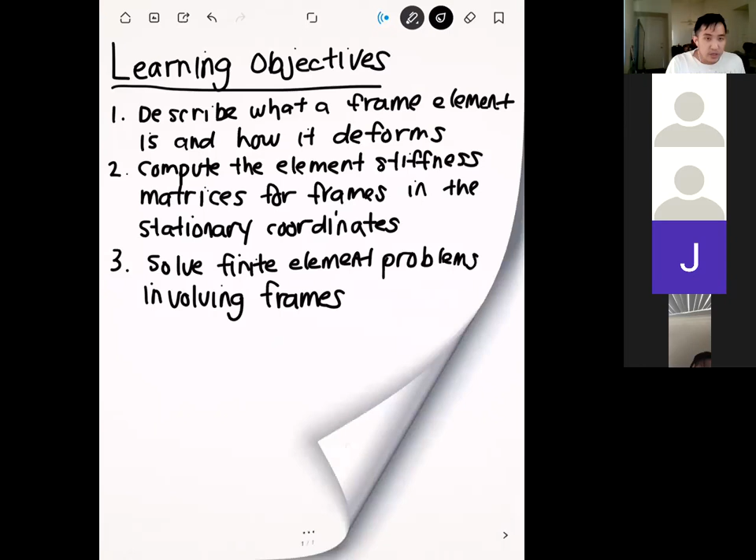Let's go ahead and finish up where we left off last week, last Monday. So where we left off was: how do we take a distributed load and convert that into a nodal load?

Just a reminder, the way we did that was we took the distributed load and used the principle of equivalent work to equate the work done by the distributed load and the work done by the equivalent nodal load. I think where we left off was at the point where we plugged in our assumed displacement function and were solving for the coefficients of each term.

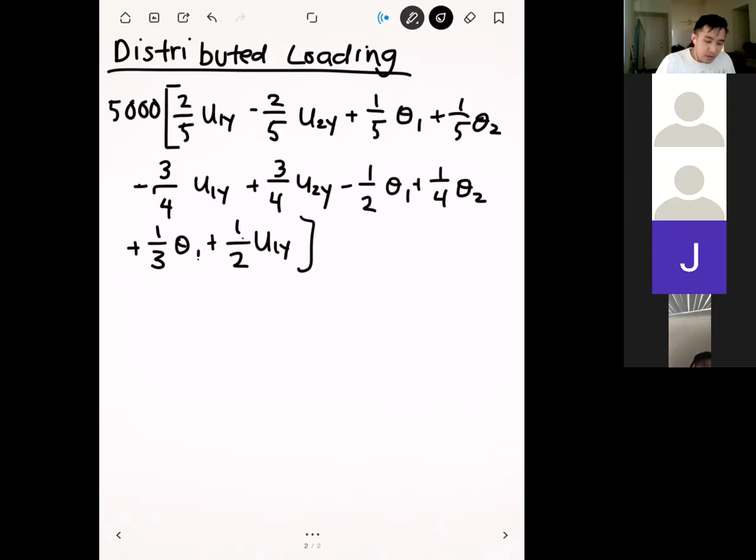Let me write out where we left off. We were at an expression like this: 5,000 (from the loading function w(x)), plus 2/5 u1y minus 2/5 u2y, plus 1/5 theta1 plus 1/5 theta2. These are for beam equations, so these are all the deformations we expect from a beam. Minus 3/4 u1y plus 3/4 u2y, minus 1/2 theta1 plus 1/4 theta2, plus 1/3 theta1, and plus 1/2 u1y. This is the expression we had at the end of lecture last time.

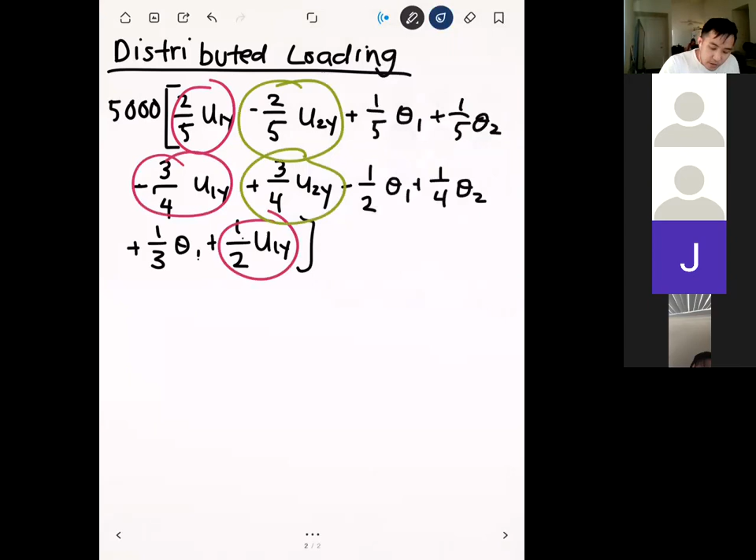What we're going to do now is take all the terms that have the same nodal value—so all the u1y's, then all the u2y's, group those together, then all the theta1's, and all the theta2's. What we want in the end are coefficients for each of these.

Question—minus 1/4, yes, thank you, I think I made that same mistake last time too. Let's go ahead and write that out and group all the terms. So we have 5,000, and then the u1y terms: 2/5, minus 3/4, and then plus 1/2.

Okay, this is all u1y, and so those are basically all the coefficients you see up there. Next, let's do u2y. So we have a minus 2/5, a plus 3/4. Okay, this is u2y.

Next, we have theta 1. So theta 1, we have 1/5, minus 1/2, plus 1/3. Okay, and this is theta 1.

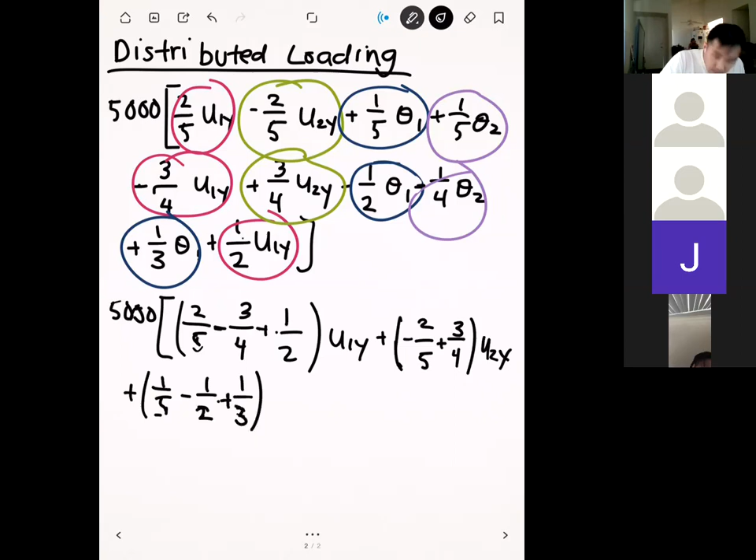And then we have theta 2, which is 1/5 minus 1/4 theta 2. Let me double check. Minus 1/2. Yep. Okay, and so what we do, all we need to do here is just perform this arithmetic, and then we'll get all the coefficients for these guys. All right, any questions on this?

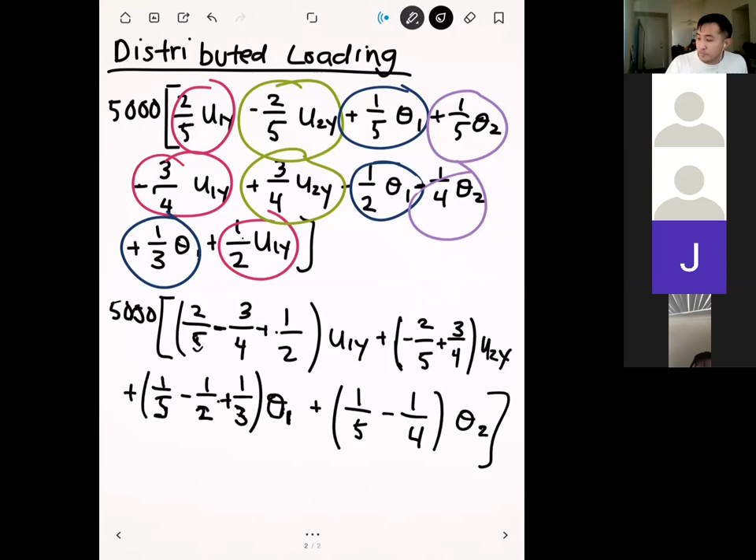Okay, and so let's perform that arithmetic. And so we do that, and then we multiply by 5,000, and we get the following. So we get 750 U1Y plus 1750 U2Y plus our only irrational guy. So we have 500 over 3, theta 1, plus 2,250 theta 2.

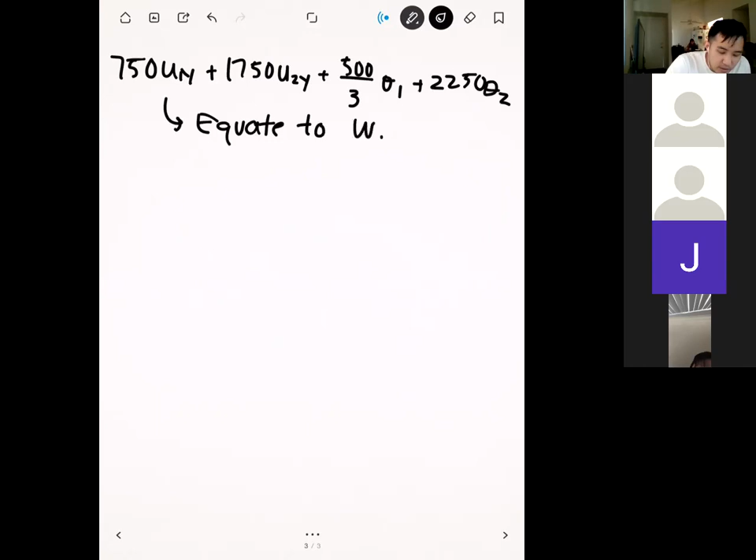Okay, and so now what we're going to do is we're going to equate this to the work done by the nodal forces. So this is work discrete. And so remember, this is equal to F1y U1y plus F2y U2y plus M1 theta 1 plus M2 theta 2. Okay, and so from here, what we can do is we can just equate the coefficients.

So we have 750, that's going to be equal to F1y. Okay, then we have 1750, and that's going to be equal to F2y. We have 500 over 3, that's going to be M1. And then we have 2,250, and that's going to be M2.

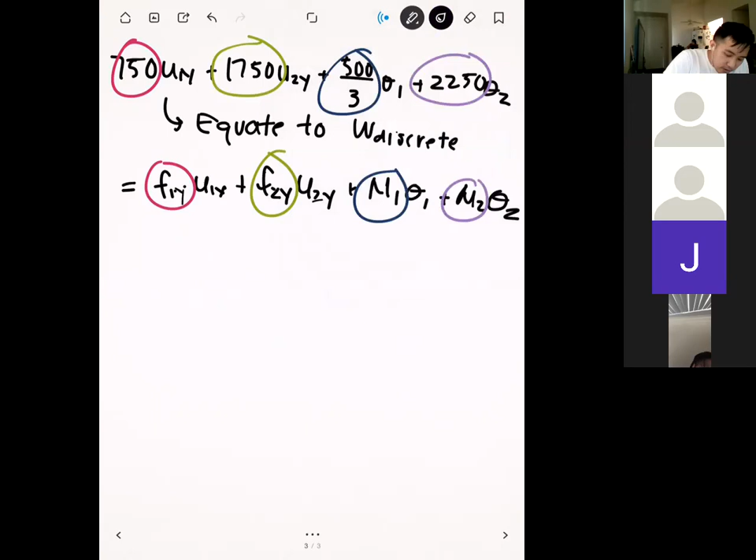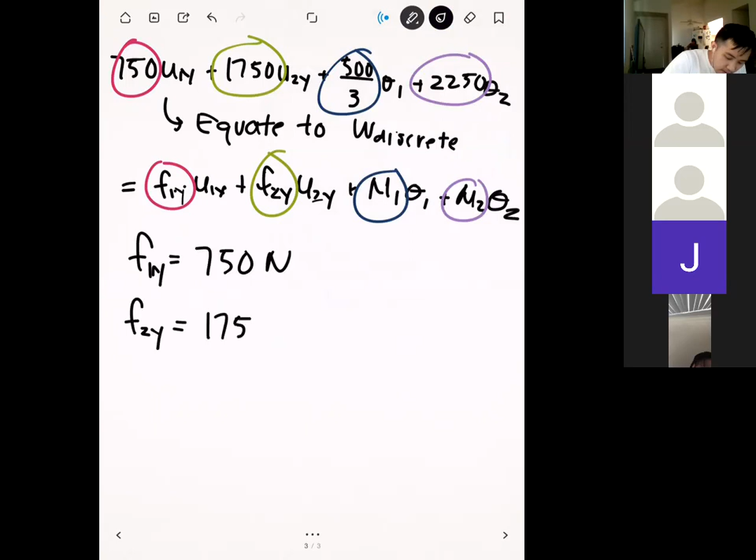Right? And so we can write out our final answer of F1y. This is equal to 750 newtons. F2y is 1750 newtons. Then we have M1, this is 500 over 3 newton meters. And then we have M2 is 2,250 newton meters.

All right, and so that's basically the end of that example of how you transform a distributed loading and then you turn it into nodal loads. Okay, all right, any questions on this example here?

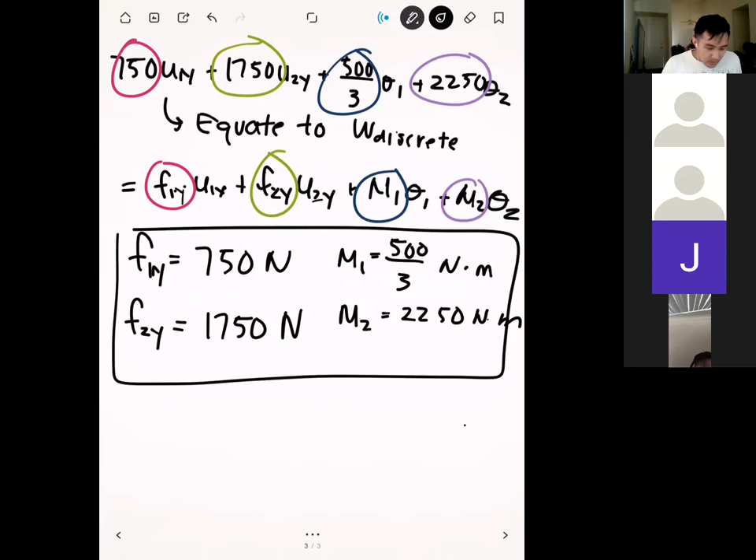Okay, so when you have distributed loading, it's quite a bit of algebra and a lot of work, but hopefully it's not too bad. It's just you have to kind of be careful with your arithmetic and make sure you carry all the signs correct. Okay, and so from there, let's move on to the next topic, which is frame equations.

So frames kind of represent the last element type that we're going to cover here in the direct stiffness method. Okay, and so let's kind of summarize just everything that we've done so far, and we'll categorize that in terms of the types of deformations that they allow.

Okay, so the first one that we did was springs. And because they deform in the same way, we'll categorize them together with trusses. Okay, and these guys were similar in that the way that they deformed was purely axially, so only you can only compress them and you can only expand them.

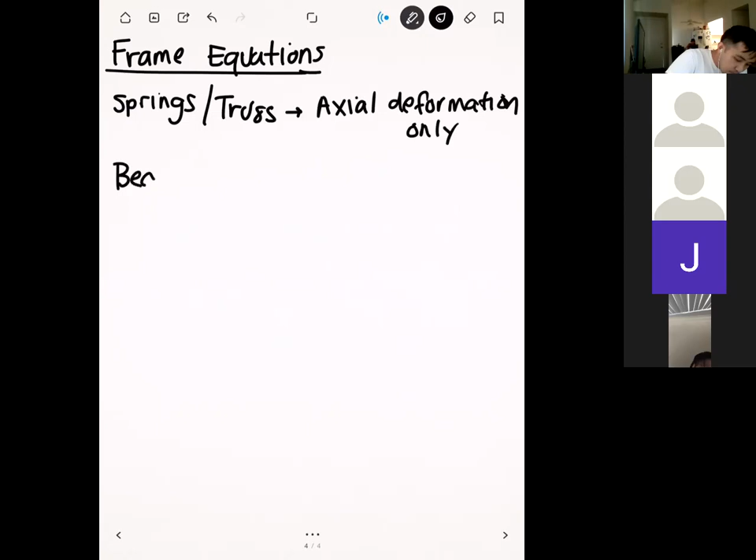And so the unit that we just finished is on beams. And so beams are unique because they can do both transverse deformation and rotation.

Okay, and so what this means is that if you want to use this direct stiffness method to analyze some kind of structure, you have to kind of make a prediction beforehand about how you think those structural elements are going to deform. And so if it's going to be a system where you only expect the elements to compress and elongate, you can model it as a truss.

But if you see that the beams or the structural elements are going to be loaded transversely and there's going to be a lot of bending, then you might select a beam for that. Okay, but as you know, in reality, a lot of times it's not that simple.

So a lot of times you'll have a structural element where you expect all kinds of deformation: axial deformation, transverse deformation, and rotation. And so in those cases, it's going to be hard to choose whether you want to do a spring, a truss, or if you want to do a beam.

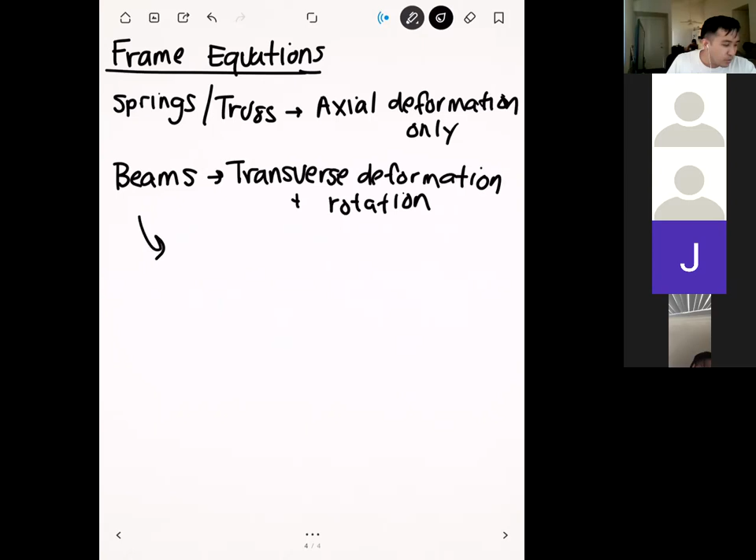But in these cases, which are complex and you can't choose, you can ask that one cute little girl from that mobile commercial a long time ago: so why not both?

Because real structural elements can deform in all these different ways, why don't we just design an element that can do all these kinds of deformations? That's exactly what a frame is. Frames can exhibit all these different types of deformation.

The way that we're going to progress through this unit is exactly the same as what we did for the previous ones: first we're going to develop the element stiffness matrix, and then once we have it, we can start to use it in problems. The only thing that's really different between all the different types of elements we've covered so far is just the element stiffness matrix. But once you have it, the way you go about assembling, assigning boundary conditions, and solving is always the same.

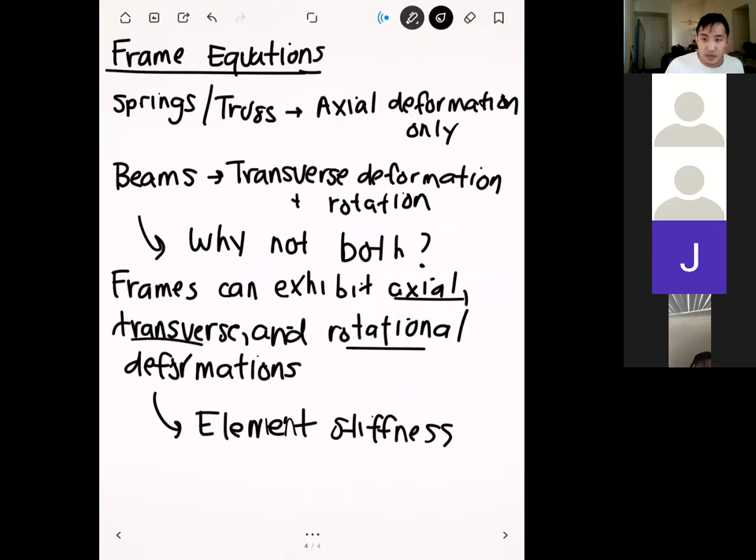Okay, so first let's do that. Let's find the beam element stiffness matrix in the stationary coordinates.

If you recall from the week that we did truss elements, the way that we transformed from the local coordinates to the stationary ones was we had to apply our transformation matrix. So our relationship looks something like this: on the left here, we have the deformations in the local coordinates.

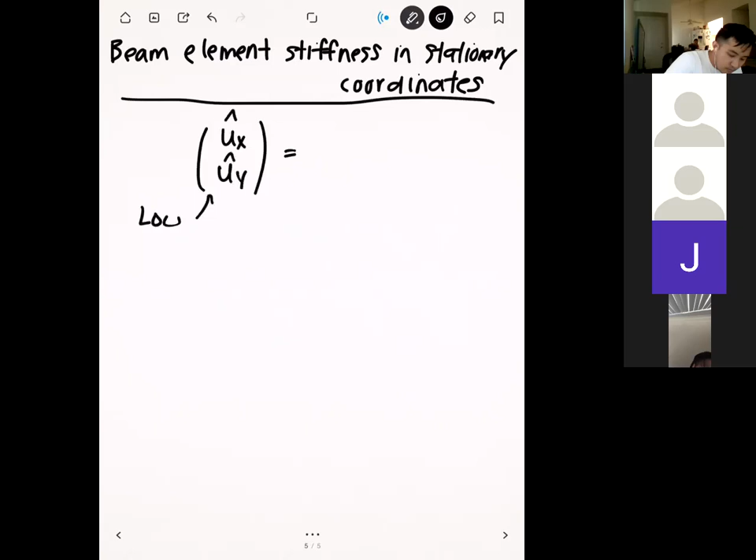Here we're just considering x and y, so there's no rotations. And then the way that we related this to the stationary deformations was that we multiplied by a matrix here. Our transformation matrix was cosine, sine, minus sine, cosine.

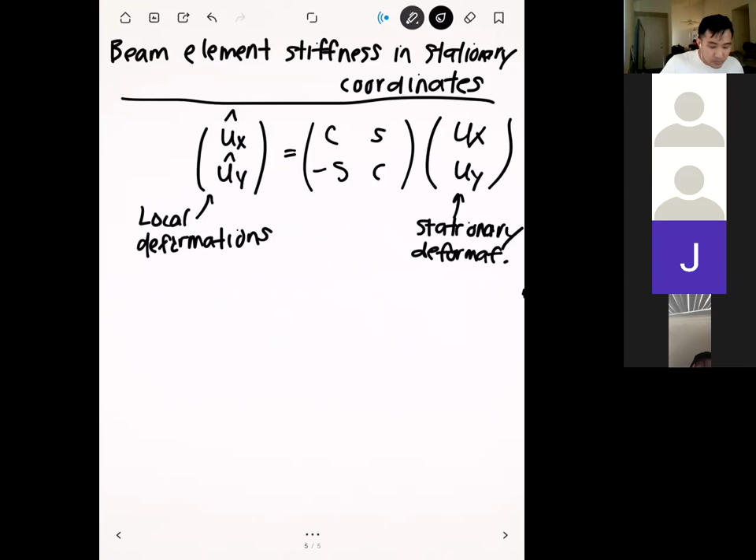So all we have to do in order to get the beam elements is to first expand this transformation matrix in order to account for the fact that our beam has two nodes and it has rotations. Let me just label this first, and for beams it would look something like this.

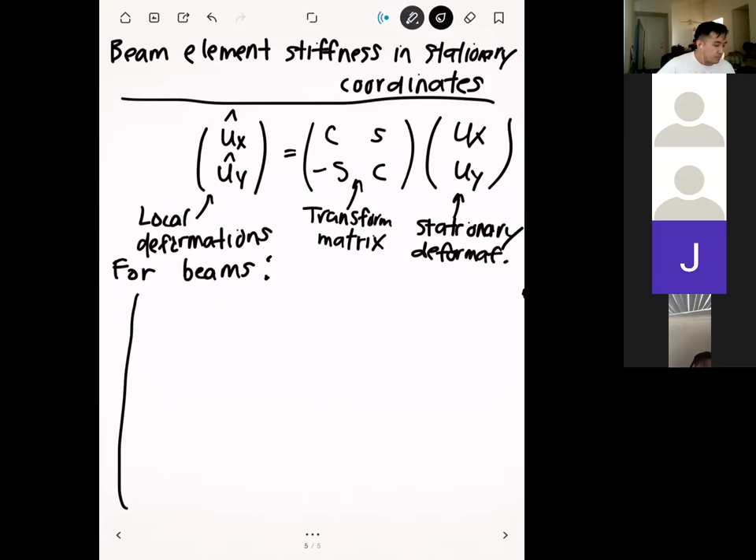First of all, even though our beams only have a transverse displacement and rotation, we're going to expand this to include everything. So we're going to have u1x hat, u1y hat, and we're also going to include the rotations, so we have theta 1. And then the same things for node 2: we have u2x hat, u2y hat, and theta 2 hat.

And so if we expand this transformation matrix, we can get the transformation. This is going to be cosine, sine, minus sine, cosine. That's our transformation matrix, and that's how we're going to transform the ux and uy.

So the question now is, how do we actually transform the rotations? Because the rotations here don't show up in our transformation matrix. We're actually in luck: since rotations don't have any units, we don't need to transform them at all. We can just put the same values over like that. Since rotations are given in terms of radians, which isn't technically a real unit, we don't have to multiply by sine or cosine, so we can just have a 1 right here.

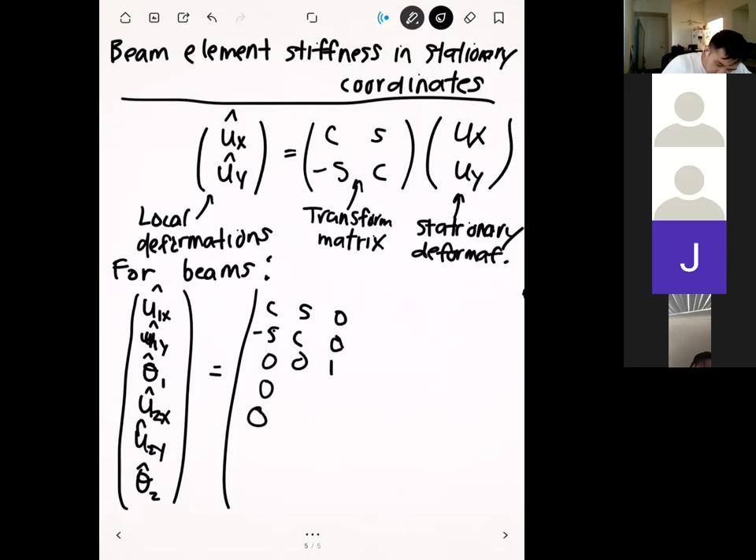Okay, so that's the transformation quadrant for node 1. And then we input the same thing for node 2. So we have cosine sine 0, minus sine cosine 0, and then 0, 0, 1. So here's the transformation quadrant for node number 2.

And this is going to be equal to the analogous things in the stationary coordinates. So we can use this transformation matrix along with the local deformations in order to get the deformations in the stationary coordinates. Any questions on this?

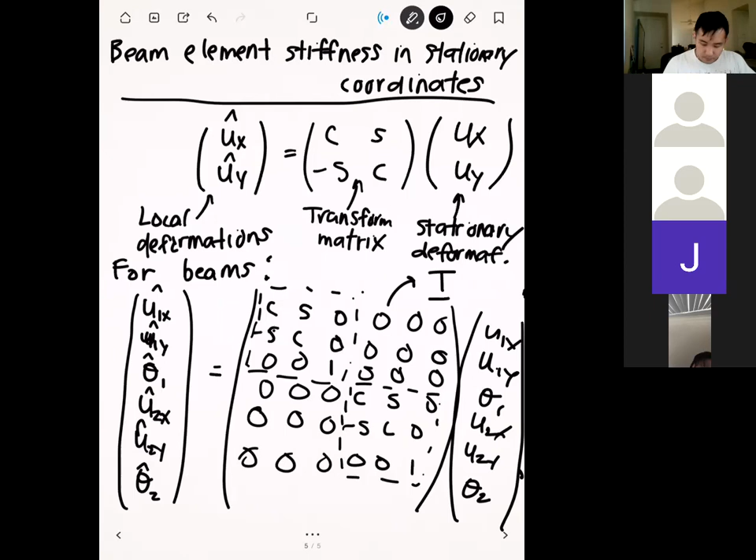Now that we have our transformation matrix that accounts for the rotations, all we have to do is multiply this both before and after our element stiffness. So in order to get the element stiffness in the stationary coordinates, we take K, where K hat here is the element stiffness matrix for a beam, which we covered last week. We pre-multiply by our transformation matrix transposed, and then we also post-multiply by that as well. So same process that we did for trusses, except now our K is different. If we evaluate this, we get the following.

So we still have an EI over L cubed out in front.

Then we're going to have 12 sine squared, minus 12 sine cosine, minus 6L sine, minus 12 sine squared. Actually, let me rewrite this so I have more room. So it'd be 12 sine squared, minus 12 sine cosine, minus 6L times sine, minus 12 sine squared, 12 sine cosine, and then minus 6LS. So that's the first row.

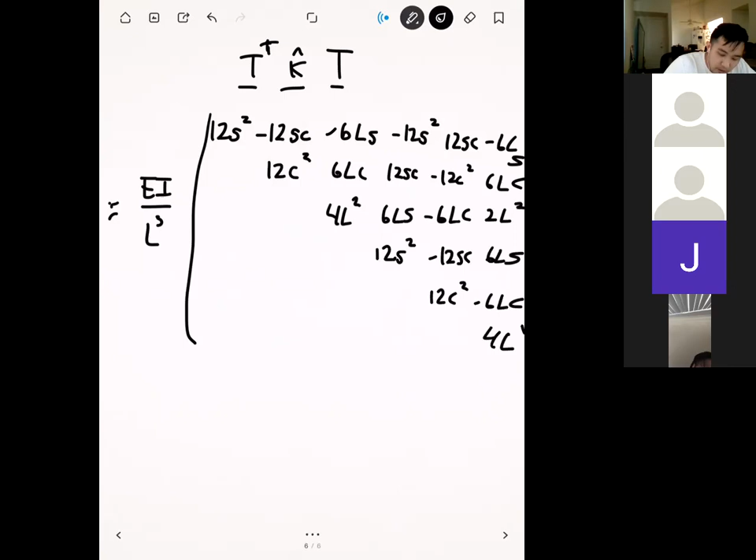We have 12 sine squared, minus 12 sine cosine, 6L sine. Then 12 cosine squared, minus 6L cosine, and then 4L squared. And of course, this is symmetric.

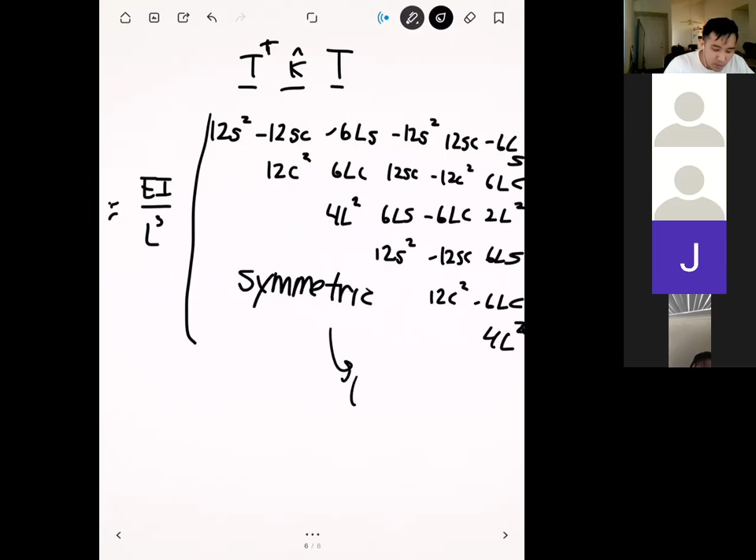A much neater version is in the notes, so I would look at that one more than this. But you can see that this is starting to get pretty big. So now we have an element stiffness matrix that's 6 by 6, which I think is bigger than anything we've had before. The addition of the rotations that the beam introduces really complicates things quite a bit, and it makes our element stiffness really huge.

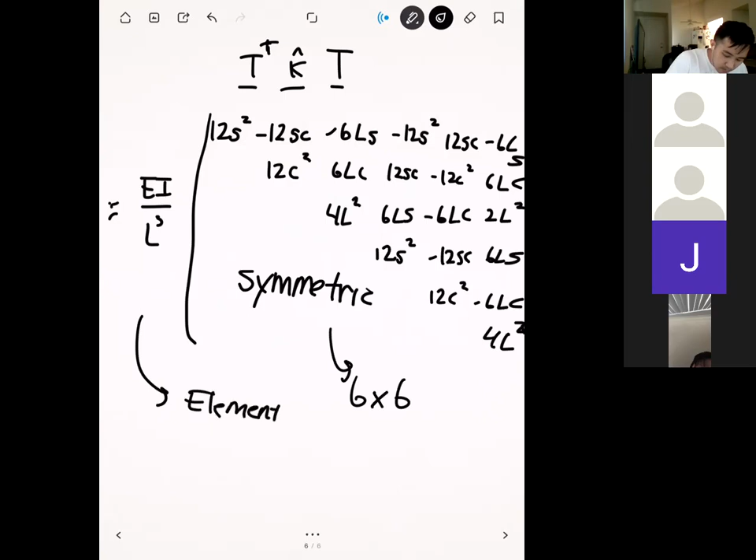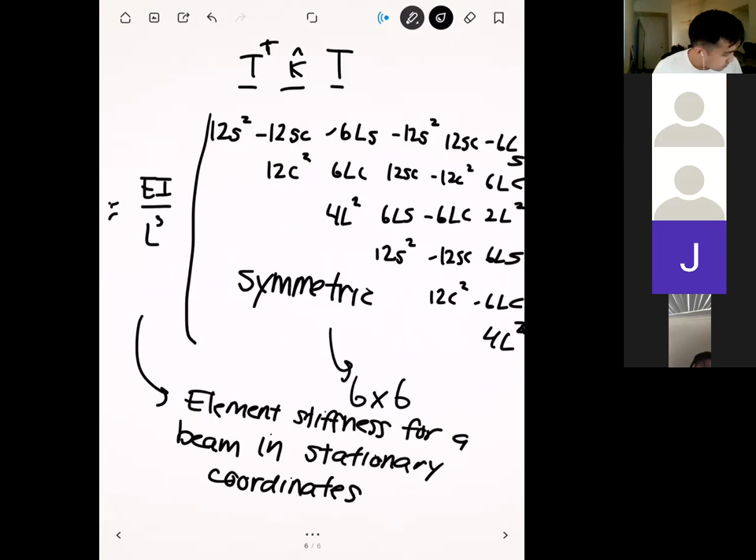And so this is our element stiffness matrix for a beam in the stationary coordinates. Any questions on this?

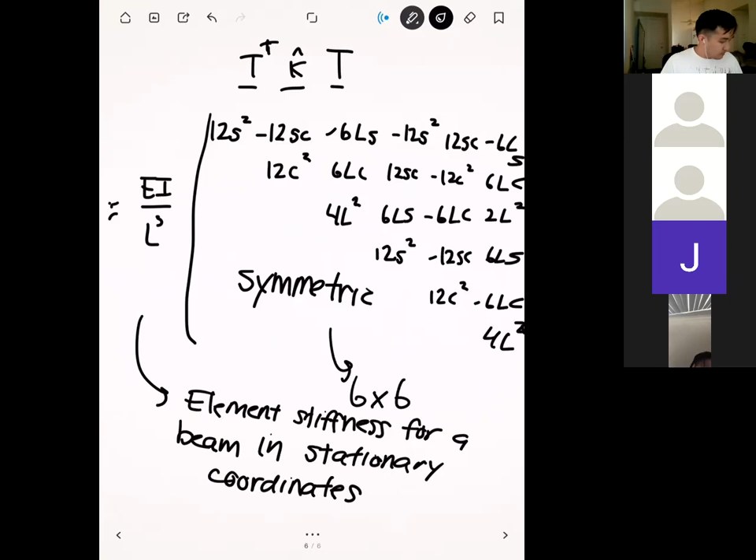So that's the stationary coordinates for the beam, but we're not really interested in beams anymore. We want to move on to frames. Remember, frames combine both the axial deformation of a truss together with the transverse and the rotation of a beam.

That kind of begs the question of how are we going to form this element stiffness matrix? Well, we actually don't have to do that much, because we already have an element stiffness matrix for a truss, and we already have one for the beam. Why don't we just combine the two into one?

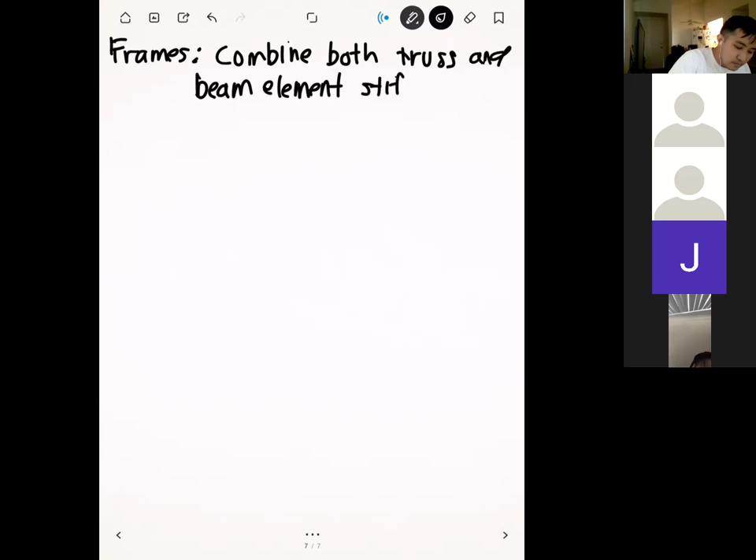So let's do this first in the local coordinates. Let's define two variables just to make things easier, hopefully help me fit it all in one line. Let's define C1 to be, if you remember, kind of like our spring constant for a truss. So it's the cross-sectional area of the element times the Young's modulus divided by the length.

Question: for multi-axial deformation, do we have to have rotation not be dependent? Yeah, that's true. If you have a three-dimensional problem where the rotation can go both in and out of the plane, then there's going to be some dependencies there. But we're just considering 2D problems, so the rotation is assumed to be independent. We also assume relatively small rotations, so we can relate it to the transverse deformation by the derivative, which helps keep it independent from each other.

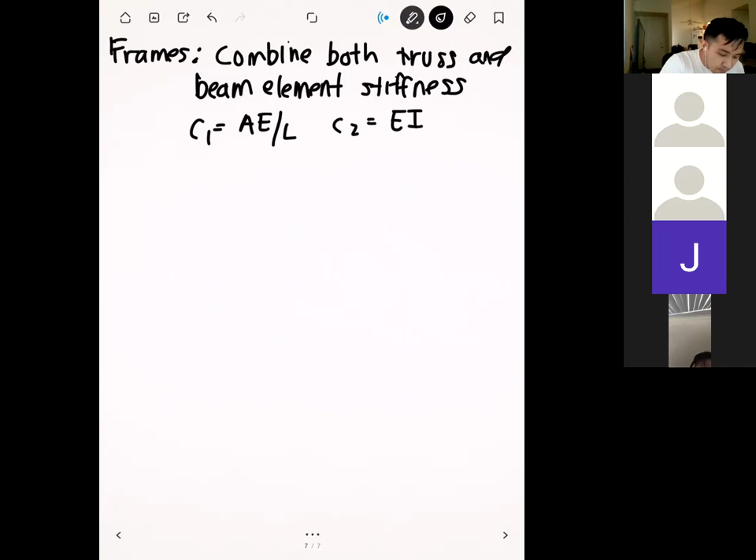Okay, and so we can define another constant C2, and this will be EI all over L cubed. And if we just straight up combine these guys together, then we get the following matrix.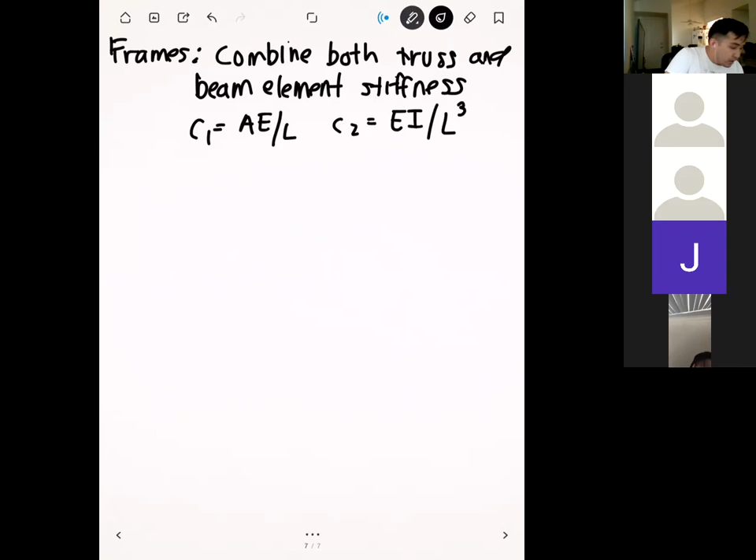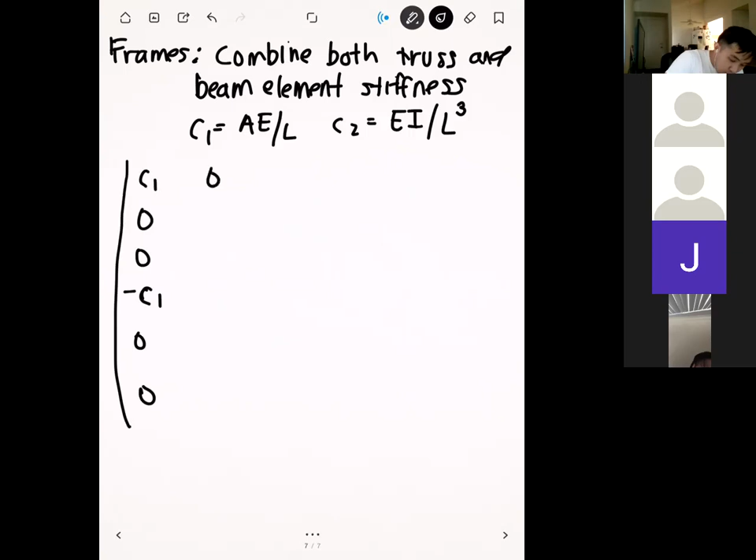Okay, so we have C1, let me go down the column first. So C1, 0, 0, minus C1, 0, 0. Okay, then we have 0, 12, C2, 6, C2L, 0, minus 12, minus 12, C2, and then 6, C2L.

Okay, and so if you notice from the C1, C2, the C1 comes from the truss and the C2 comes from the beam. Then we have 0, 6, C2L, 4, C2L, 0, minus 6, C2L, and then 2, C2L.

We have minus C1, let's bring that closer here. Minus C1, 0, 0, C1, 0, 0.

And then we have 0, minus 12, C2, minus 6, C2L, 0, 12, C2, minus 6, C2L. Right, and then our last column: 0, 6C2L, 2C2L, 0, minus 6C2L, 4C2L squared. Okay, and so this guy right here, this is the element stiffness matrix for a frame in the local coordinates.

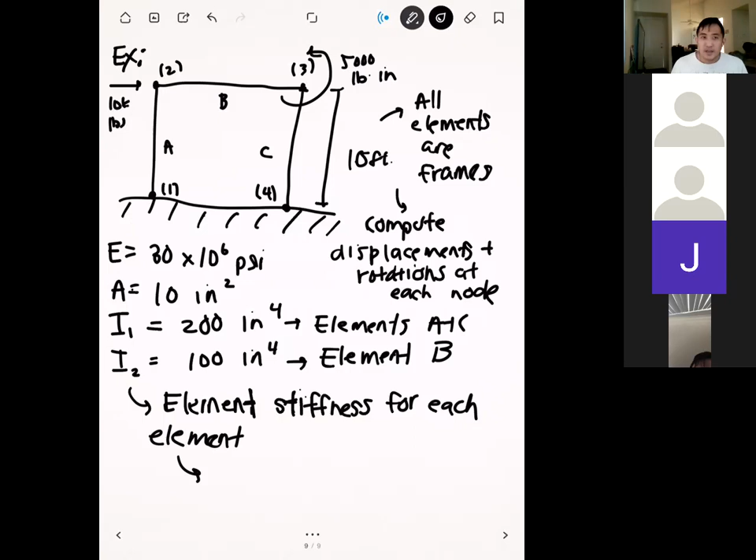And so the biggest challenge with these frame problems is that your global system, and actually all your matrices, are going to be enormous. It takes a lot of space to write these guys, but the process is still the same, so we're going to go through that right here. Before we jump into that, are there any questions on the problem setup?

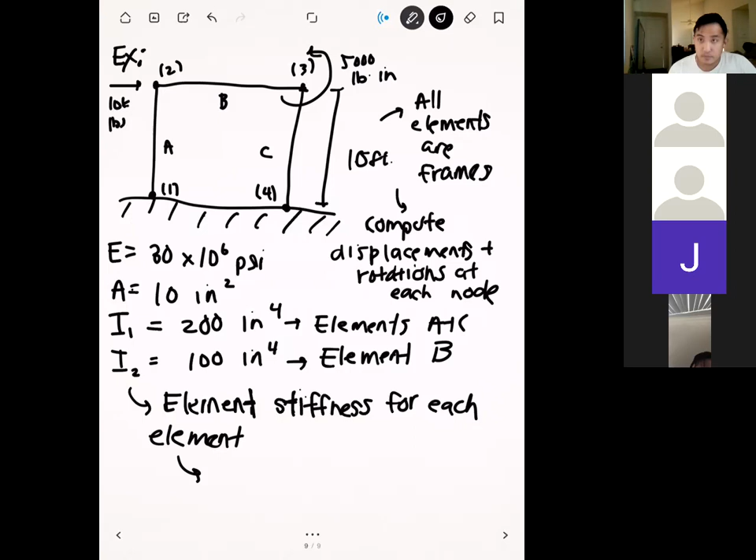Okay, so let's run through this. Let's start with element A.

So for element A, our angle here is 90 degrees. Cosine of 90 is equal to 0, and sine of 90 is equal to 1. I chose this as our first example problem on purpose, because having a 90-degree angle means a ton of terms are going to cancel out.

I'm going to give you the Matlab script, but if you did want to compute this by hand, usually it's helpful to compute some of these constants ahead of time.

So let's say you want to compute 12I over L squared. This is going to be 0.167 inches squared.

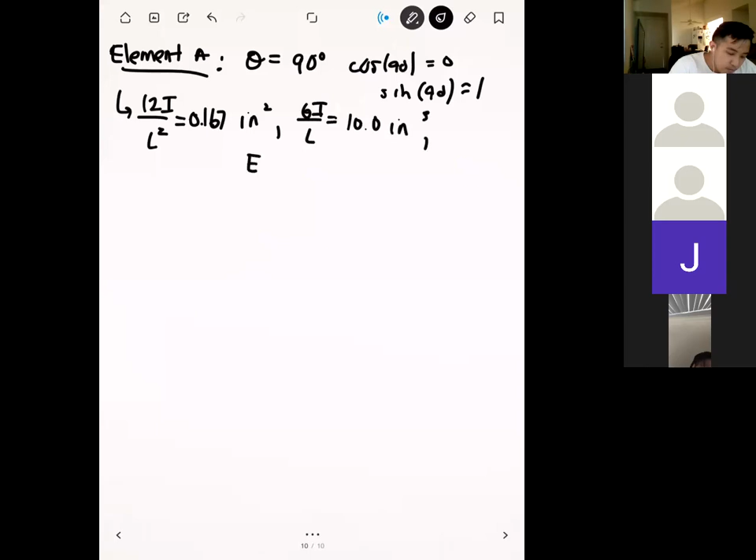Next, we can compute 6I over L, and this would be 10 inches cubed. Then finally we can compute E over L, the term out in front, and it's going to be 250,000 pounds per inches cubed.

So we plug all these numbers in. For now we can just assume Matlab did it, and then we get the following matrix. First we have our E over L factor out in front, and then we have our 6 by 6 matrix here, which is going to be.

0.167, 0, minus 10, negative 0.167, 0, minus 10. Then we have 0, 10, 0, 0, minus 10, 0. Then we have minus 10, 0, 800, 10, 0, 400. Then we have minus 0.167, 0, 10, 0.167, 0, 10. We have 0, minus 10, 0, 0, 10, 0. Then we have minus 10, 0, 400, 10, 0, 800.

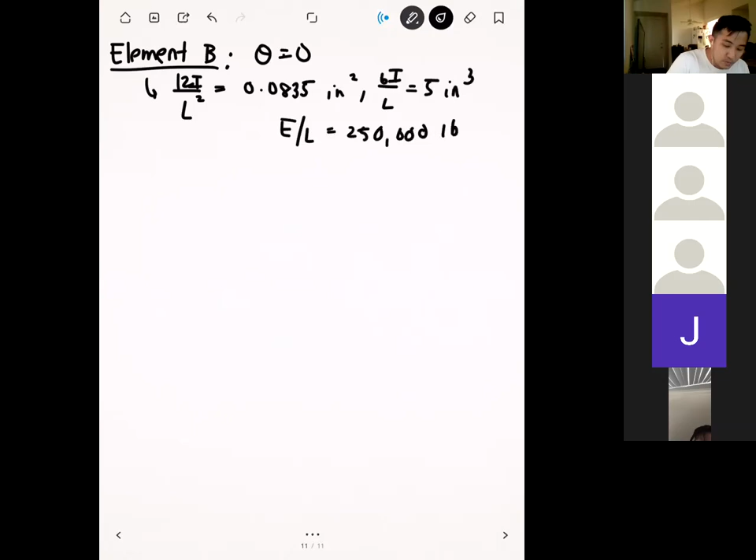So we can plug this in and get a similar kind of matrix, KB. I'll just write the first 3 rows and you can pick it up from there. This is going to be 250,000, times: 10, 0, 0, minus 10, 0, 0. Then we have 0, 0.0835, 5, 0, minus 0.0835, 5. You guys hear my cat in the background? Then 0, 5, 400, 0, minus 5, 200.

There's 3 more rows here, but you get the idea—this is just plug and chug at this point. And then we can do the same for element C.

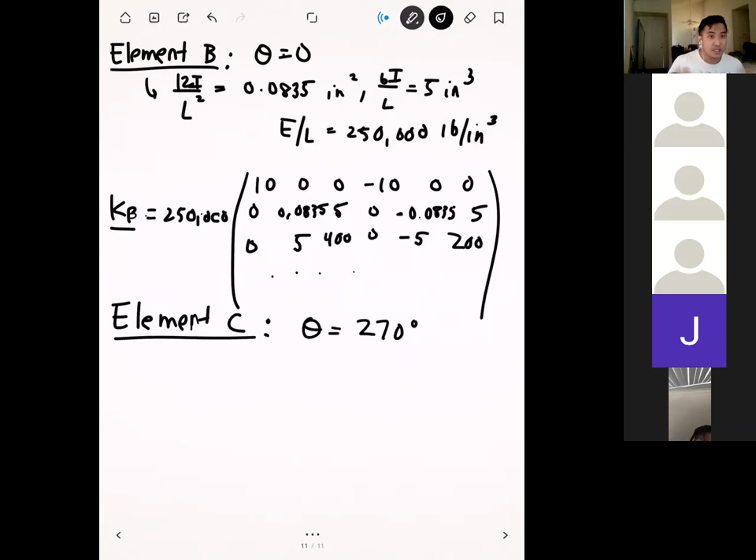Okay, so element C, the lower number node is on top, and so in order to rotate all around, our theta has to be 270 degrees. And these actually have the same parameters as element A, so just some of the signs would be reversed, and KC will also equal 250K.

And then we'll have our 6x6 matrix right here. I have all these written out in the notes. It's just in the lecture, because my iPad's really small and we only have a limited amount of time, I'll leave that to you guys. But it's basically just the same process we did before, just the matrix is a lot bigger.

Okay, so now that we have the element stiffness matrices, you have them in the notes. What we're going to do now is assemble our global system.

And since we have 4 different nodes here, and each of the nodes has 3 different degrees of freedom, that means our global system is going to be 12 by 12. The global system I'm also not going to write because I'm definitely not going to be able to fit it, but I'll at least show you where each of the stuff fits into the matrix. Any questions on this?

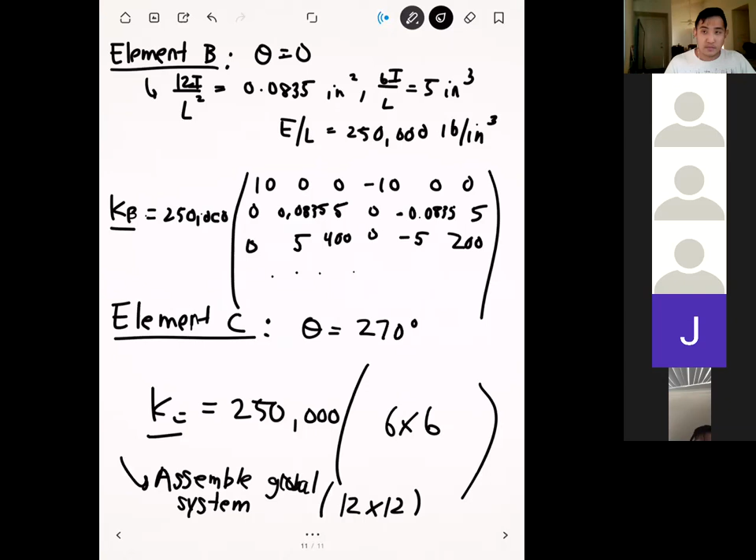Okay, so let's write out our global system. I'll give you the bones of it. You can imagine this is a 12 by 12 matrix, which is way too big to fit here. But what we can do at least is tell you where each of the different element stiffness matrices fit in.

So first we have element A, and this is our 6 by 6 matrix from element A. Next we have the 6 by 6 matrix from element B. And then finally we have the 6 by 6 matrix from element C. These are all the same methods that we used before, it's just now we've upped the scale quite a bit because we've added rotations and transverse displacements.

And I made a note of this in the homework too. The homework's not posted yet, but it will be posted soon. To construct this global system, I don't want you guys to have to write down such a long big matrix, because some of the homework problems actually are going to get even bigger than this. So if you want to use a spreadsheet program like Microsoft Excel or Google Sheets to present the global stiffness in a neat way, I would go ahead and use that, because that's a lot more practical.

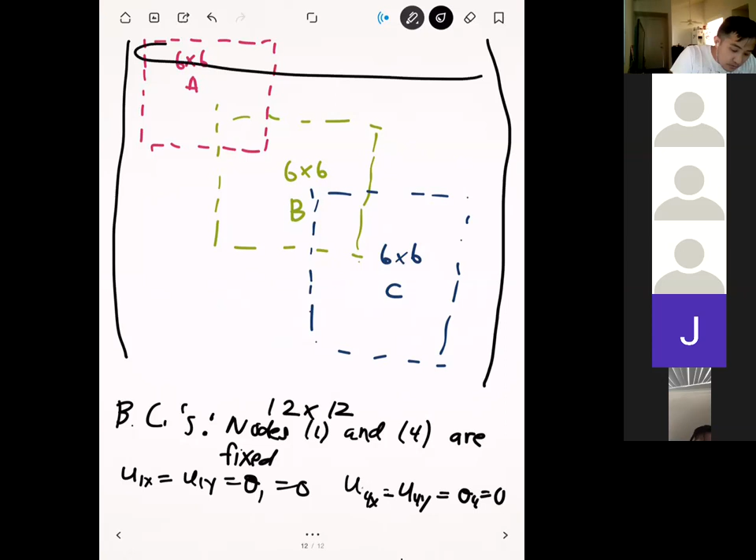So that means the first 3 rows of this matrix, and then also the last 3 rows, those are going to be replaced with our Dirichlet boundary condition. So we're going to put 1 on the diagonal and zeros everywhere else, and then zeros on the right-hand side. And then also we have to put our loads on the right-hand side too.

So remember, we had 2 loads in this case. We had a load of 10,000 on U2x, and we also have a moment of 5,000 on theta 3. I know I'm skipping all the numbers here, but all the numbers are given in the lecture notes. But are there any questions on this?

Okay, so once you plug that in, you can solve for the solution, and you'll get all the deformations, all the displacements, all the rotations at every node that can do it in this mesh. So in this case, it's only been nodes 2 and 3, so you're going to have 6 non-zero values.

Before we move on to the next example, I just want to make a couple quick notes. So first of all, just like we did in the beam equation, what you can do here is compute the reaction forces on each of the elements, or each of the nodes.

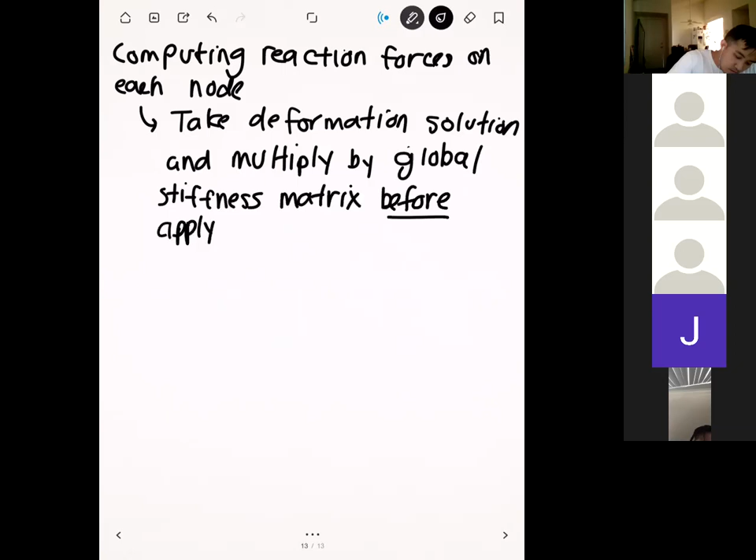Okay, so that'll give you all of the reaction forces and reaction moments in the stationary coordinates. And one thing we haven't done yet is take these reaction forces and transform them back into the local system.

So why would you want to do this? Oftentimes it's useful to compute the forces down the length of the element and transverse the element, because from those you can compute things like stresses or bending stresses. When the forces and moments are in the stationary system, you can't do this. So to get the stresses, it's usually a good idea to transform this back into the local system, using the same transformation matrix we've seen before.

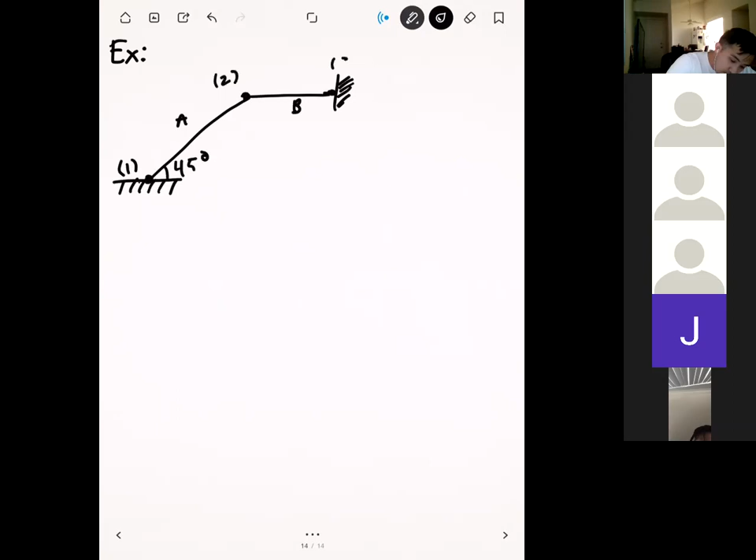So for this problem, we have a frame element that looks like this. Thankfully, we only have two elements in this case. We'll call this element A, and this element B. This angle right here is 45 degrees. And we'll label the nodes just like that.

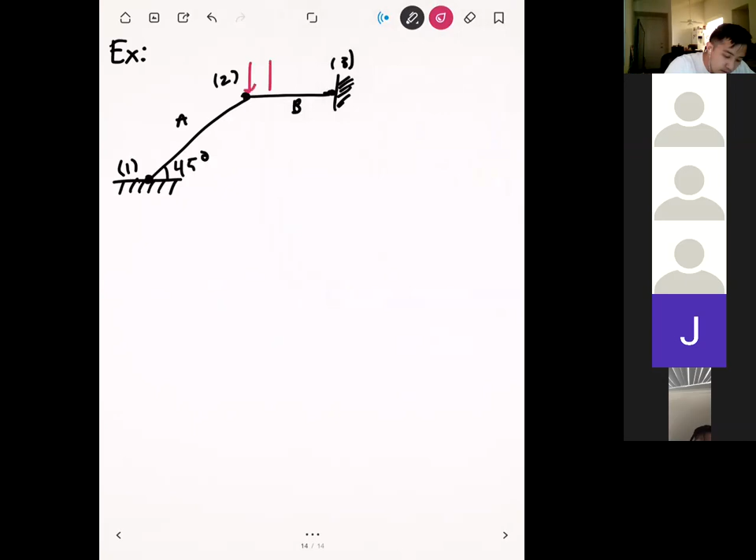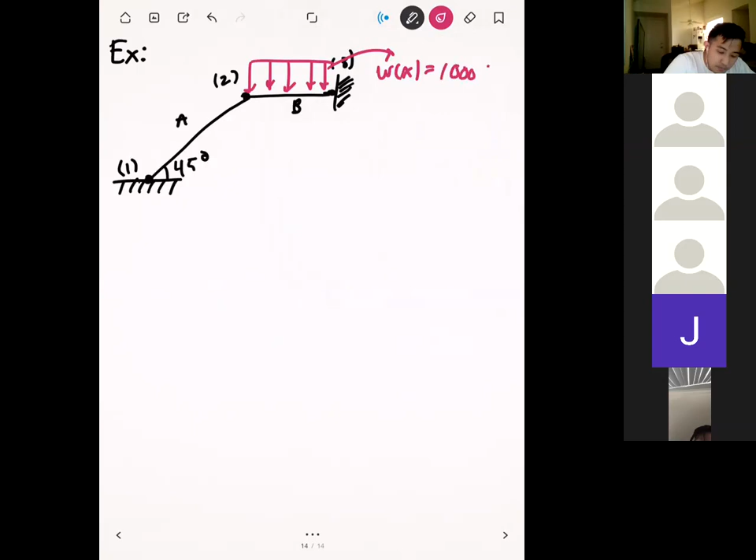And then up top right here, we're going to have a distributed loading on element B. The function for this, Wx, is simply equal to 1,000 pounds per feet. So it's just a constant distributed loading, not like the ramp we saw before.

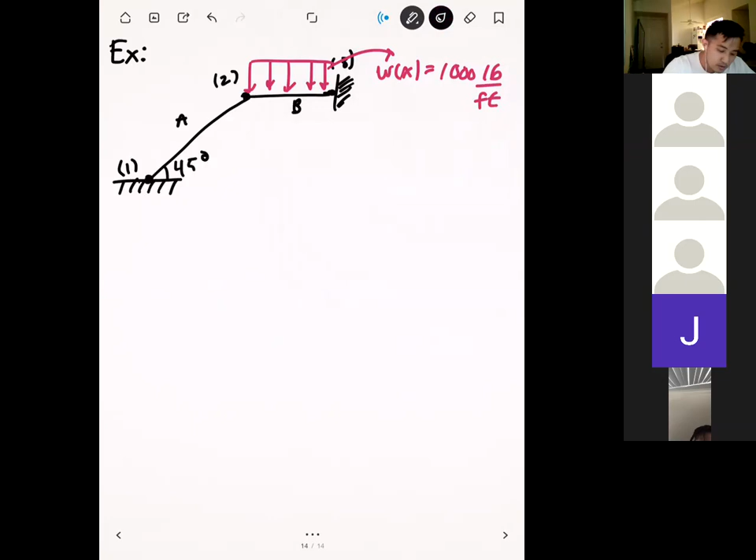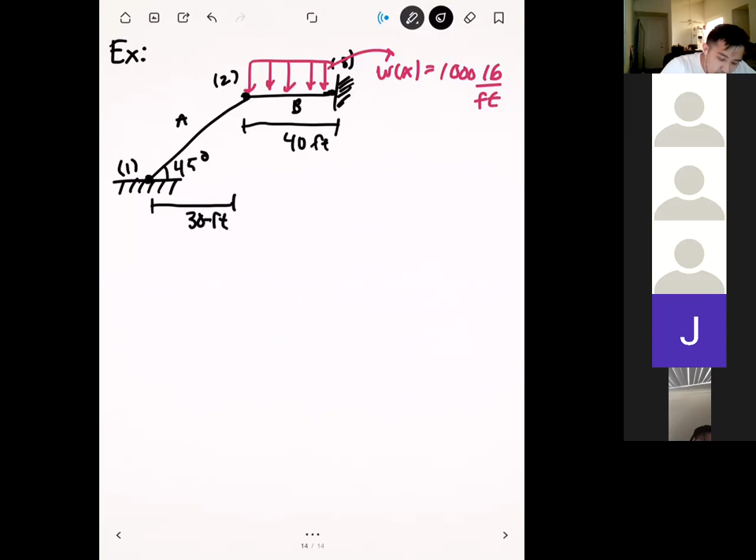Just like the previous problem, we're interested in solving for all the displacements here. Let's add some additional parameters. We know the length of this element here is 40 feet, and the horizontal length here is 30 feet. We have the Young's modulus, which is 30 times 10 to the 6 psi.

A, which is 100 inches squared. I, which is 1,000 inches to the 4th. And this is going to apply for all the elements in our system. Then what we're going to do is solve for the displacements.

And since the system is fixed at nodes 1 and 3, the only displacements that we can actually solve for are at node 2.

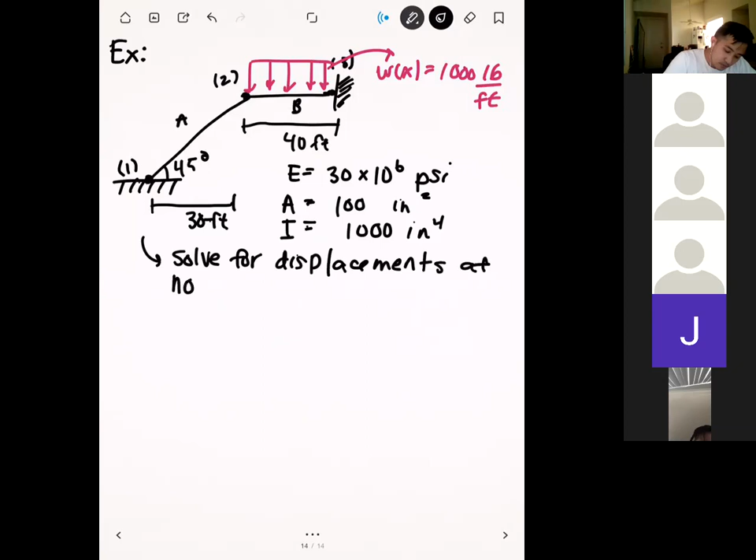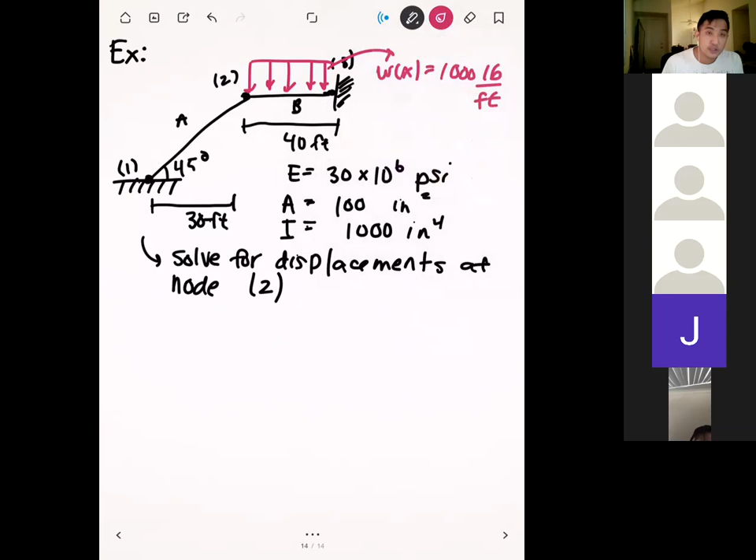So we have here another frame problem, and we can follow the same process that we did before. The big difference here is that we have this distributed loading. So before we do anything, the first thing we have to do is convert this distributed loading into the equivalent nodal loads.

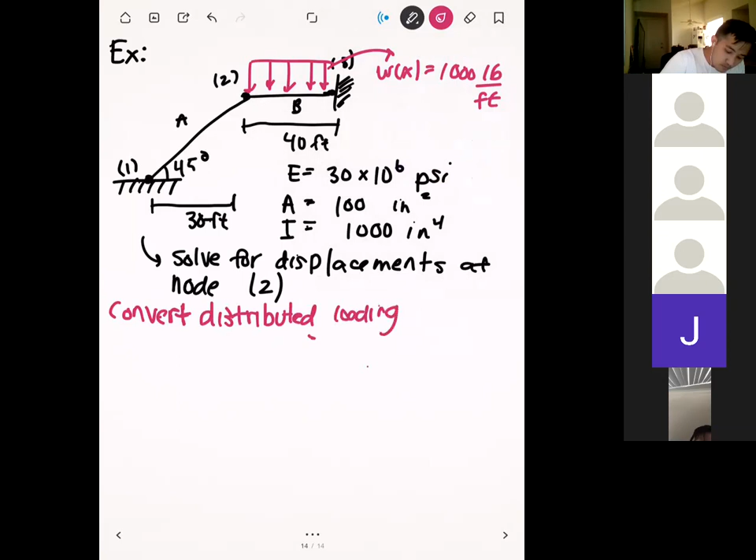Okay, so let's go ahead and do that.

Remember the principle we're going to apply here is the principle of equivalent work. What that states is that the integral from 0 to L of our distributed load multiplied by our displacement function uy of x, dx, has to be equal to the following.

f1y u1y plus m1 theta1 plus f2y u2y plus m2 theta2. This quantity on the left-hand side is the work done by the distributed load, so this is work distribute. And this over here is the work done by the nodal loads, so this is work discrete.

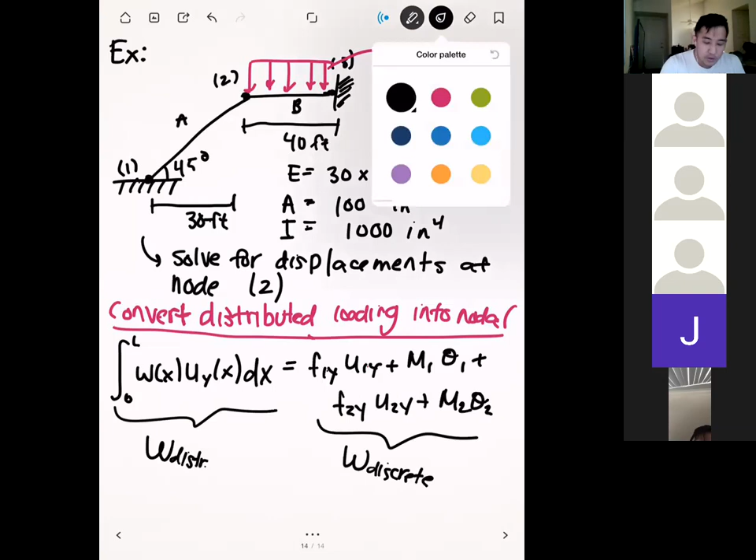Most of the work in this problem is going to be evaluating this integral. Thankfully, this integral is going to be a little bit easier to evaluate than the one we did as an example at the end of last class, because our w of x here is a constant function. That's going to simplify our integrals very slightly, but it's still going to be quite a bit of terms. Any questions on the problem setup?

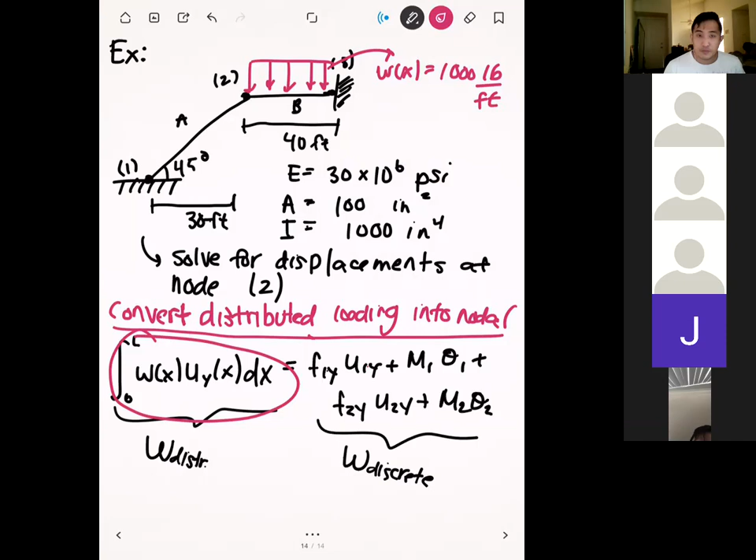Okay, let's start integrating. Let's remind ourselves what uy is. Remember, uy is a function that describes how the transverse displacement of this frame varies as a function of x.

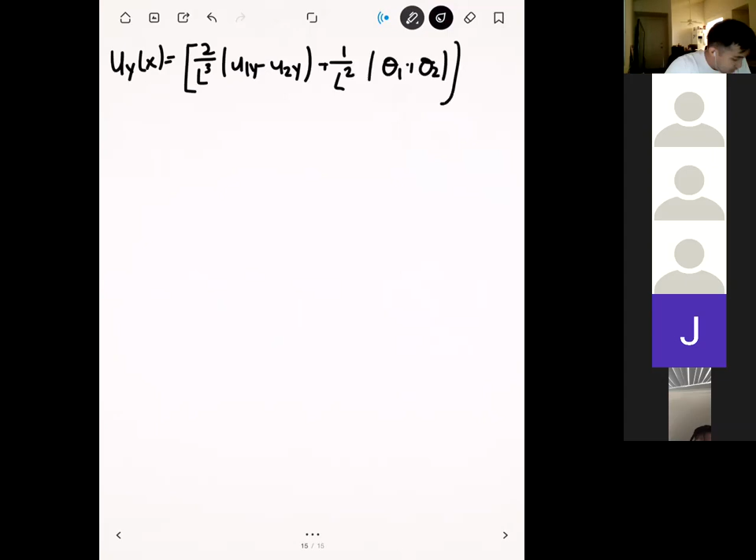This function is given by 2 over L cubed times (u1y minus u2y) plus 1 over L squared times (theta1 plus theta2), all multiplied by x cubed. Remember, because we derived this equation from the beam equations, and since the beam equation was a fourth order differential equation, we use a cubic function here, so that's why we have x cubed.

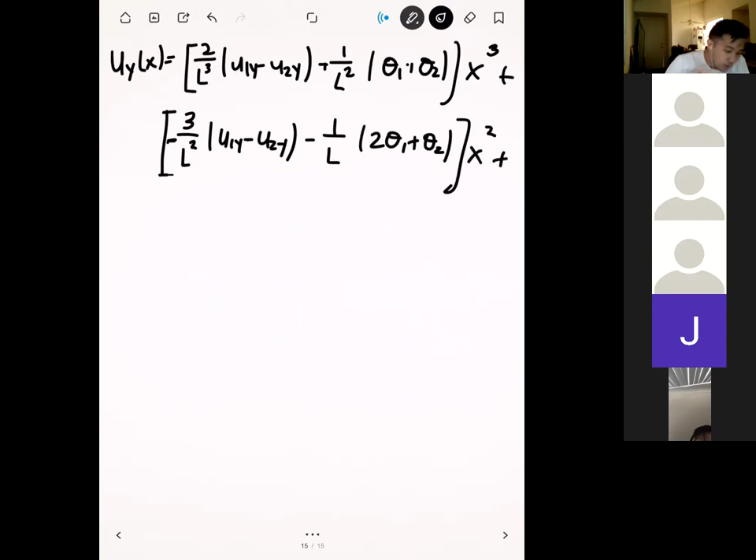Plus minus 3 over L squared times (u1y minus u2y) minus 1 over L times (2 theta1 plus theta2), all multiplied by x squared, and it's going to be plus theta1 x plus u1y.

So what we need to do here is, since our w of x is just a constant, we can simply start integrating this. If our w of x depended on x, we would have to account for that x dependence, but since that's not the case, we can just start multiplying or integrating.

We can say that our work distribute is equal to, and since our w is just a constant, we're going to pull that out. So we have 1,000 out here - that was the value of our w of x. Then we're going to start integrating all the other terms. Let's start with the first one.

First we have 2 over L cubed times (u1y minus u2y) plus 1 over L squared times (theta1 plus theta2). And the integral of x cubed is going to be x to the 4th, all divided by 4.

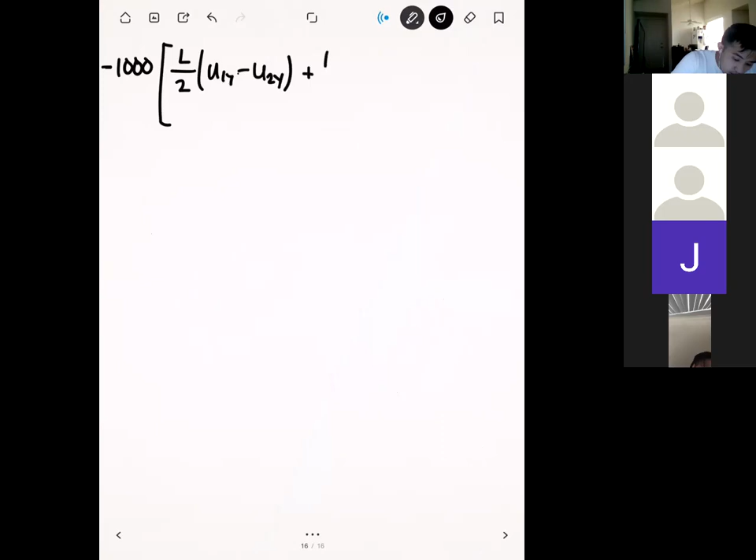That's for sure. Okay, so let's start evaluating the integrals. If we do that, we get the following: we have a minus 1,000 out in front, then we have L over 2, multiplied by u1y minus u2y, plus L squared over 4, theta 1 plus theta 2.

So I evaluated x at x equal to L, and distributed that through, so that's how I got this: minus L times u1y minus u2y, minus L squared over 3 times 2 theta 1 plus theta 2, plus theta 1 L squared over 2, plus u1y L.

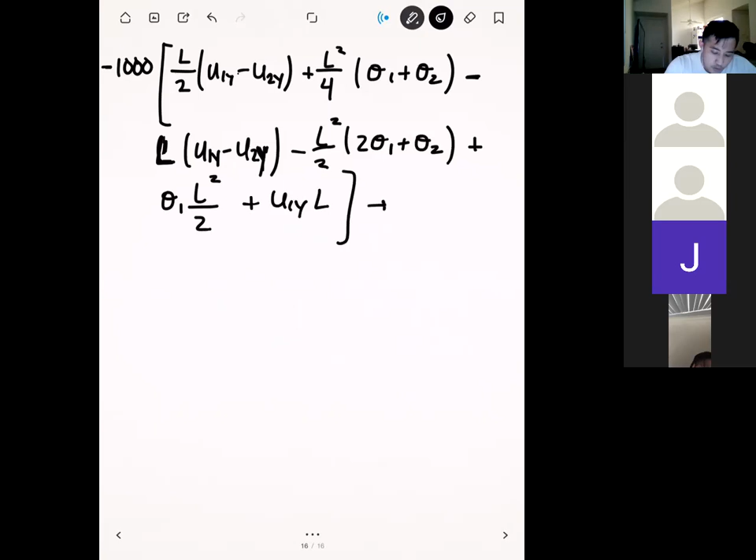Now we can plug in for L, and then let's distribute the minus 1000. Then we end up with the following: we get 2e4, so that's 20,000 minus 20,000 times u1y minus u2y, minus 4e5 times theta 1 plus theta 2, plus 4e4 times u1y minus u2y, plus 5.33e5 times 2 theta 1 plus theta 2, minus 8e5 times theta 1, minus 4e4 u1y.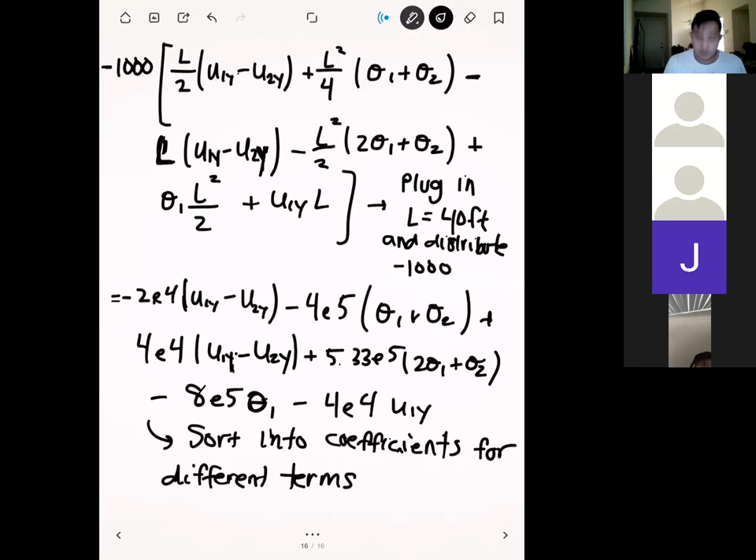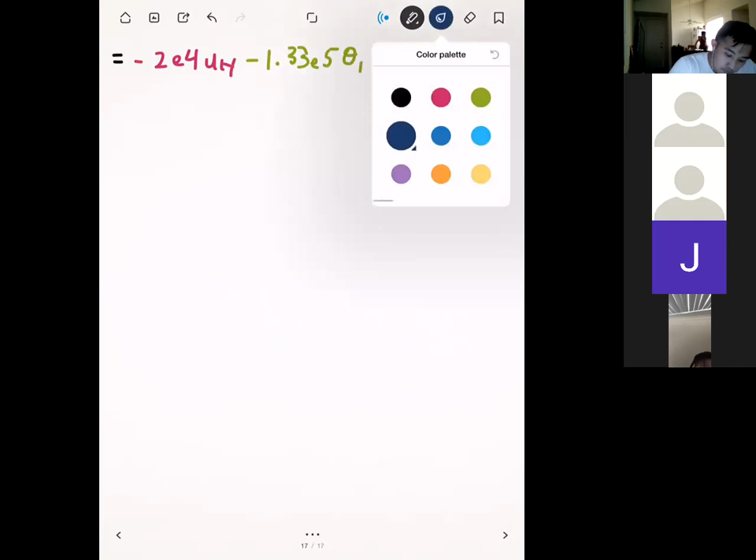After we sort the coefficients and add them all up together, we end up with the following: minus 2e4 u1y, minus 1.33e5 theta 1. Next we have minus 2e4 u2y, and then finally we have a positive 1.33e5 theta 2.

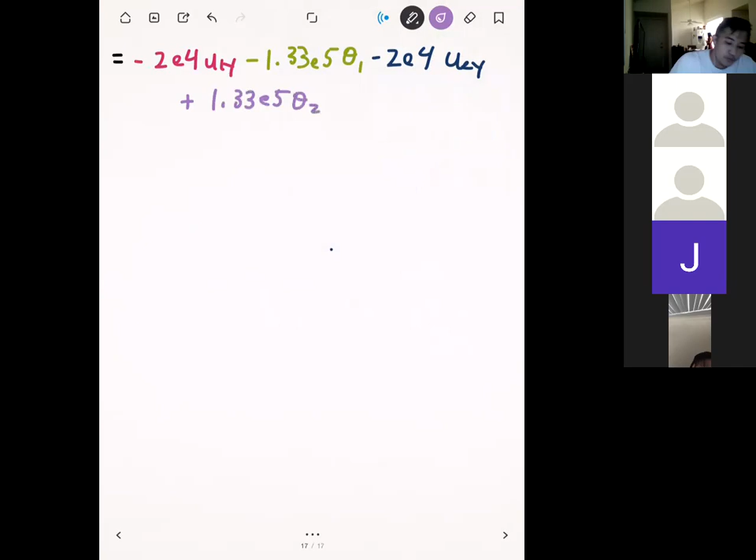From this we can see that f1y is equal to minus 2e4 pounds in this case. We have m1 equal to minus 1.33e5 pounds feet. We have f2y equal to minus 2e4 pounds, and then m2 equal to a positive 1.33e5 pounds feet. So just like we did before, just reading off the coefficients for this problem.

And so now that we've done that, we have all the nodal loads, and we can apply this onto our problem in order to do the finite elements. Just a quick sanity check: we notice we have a constant distributed load, and our F2y and F1y have the same magnitude, which makes sense because it's a load that's evenly distributed. So small sanity checks like that can help you out a lot.

I have a question, Professor. Sure, what's up? The L here is the distance between node 2 and 3, that's right? Yes, so since this distributed load was only on element B, the L that we use is the length for element B, so that's going to be 40 feet. Okay, thank you.